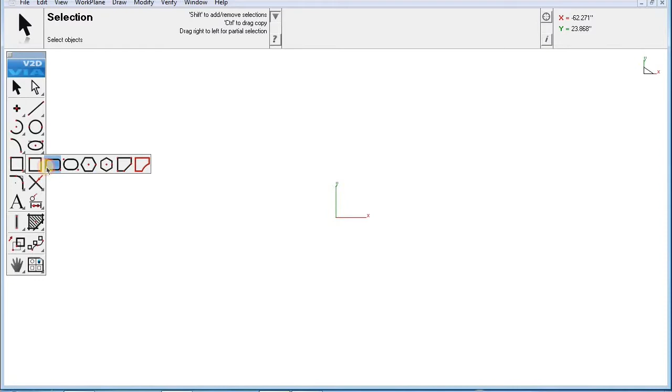First, we're going to want to select our square tool. You will see on the left hand side there's many different tools here, and if you click and hold down, all of the other types of tools and polygons will come up. We'll do this for every single tool. So first we're going to use our square tool. Let's do a 4 by 15 square.

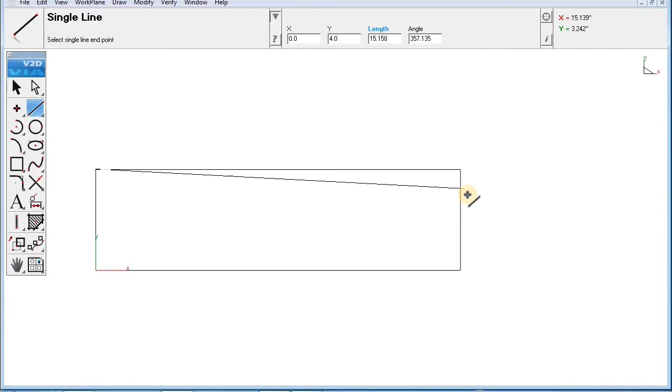Next, what we're going to want to do is draw our lines. These lines are going to make our shape. So we're going to basically take a line here, from here to here, to the midpoint, a line from here to here. Now, we could take and delete these two lines. Basically, you just click on the line, hit backspace to delete it.

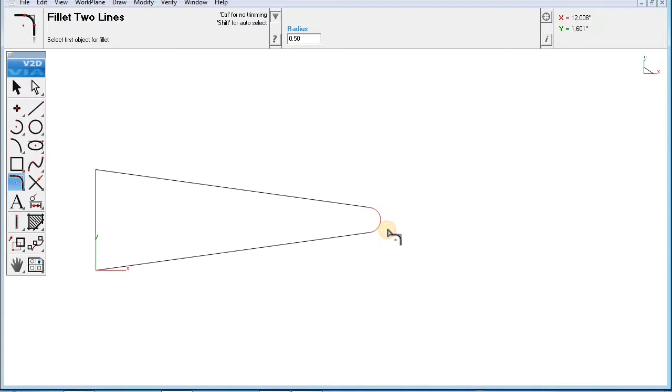And now we're going to take our radius tool. We'll try a radius of 1/2 inch. You're going to want to click on this line, and then click on this line. And then you're going to want to click this line to this line, this line to this line. Now we have our radiuses.

Now we're going to take and put a 1/2 inch hole on this end. So we're going to click, hold down, go to our single line, 1 point circle. We're going to type in 0.5. Now we're going to take and put our 1/2 inch circle in the center of this radius.

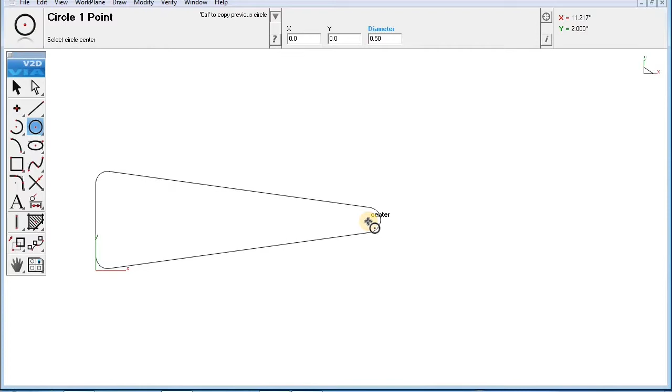Next, we're going to set this for a 2.5 inch pipe, as if you were to weld this onto an axle or whatever you would. So we're going to want to make a 2.5 inch circle, put it on our midpoint.

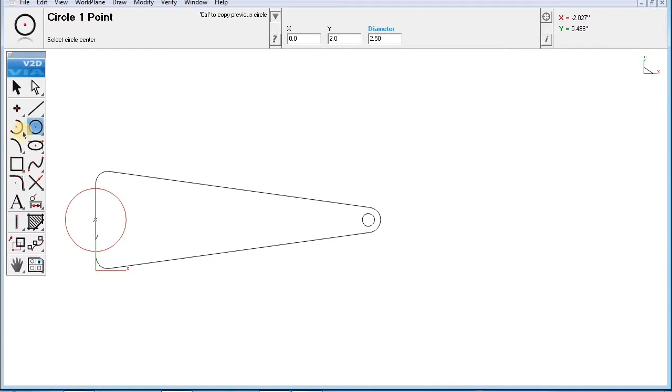Then what we could do is come over here to our center point arc. We're going to click once in the center, click on the 2.5 inch mark right here, swing it around up to here.

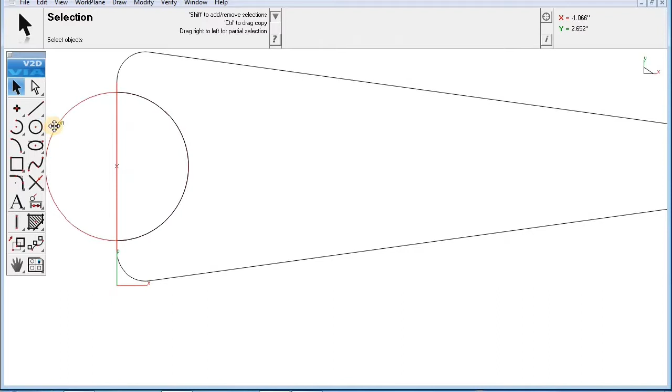And now we can take our selection tool and delete these two lines, and then we're going to take this line, connect it from here to here, connect it from here to here.

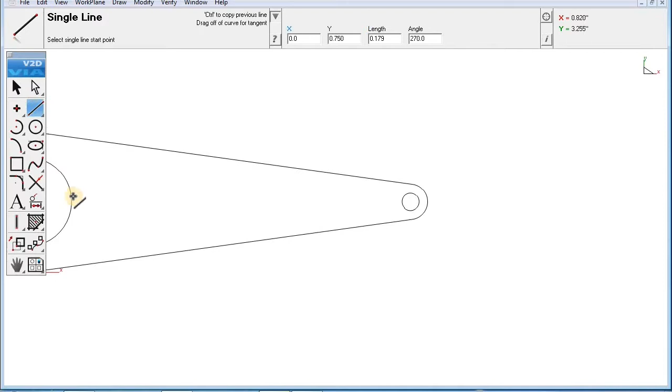Now to give it a bit of a better look, we could take it, put a couple circles down through here. The best way to do that is just to take and draw a center point line, and then we'll just do a 1.5 inch circle.

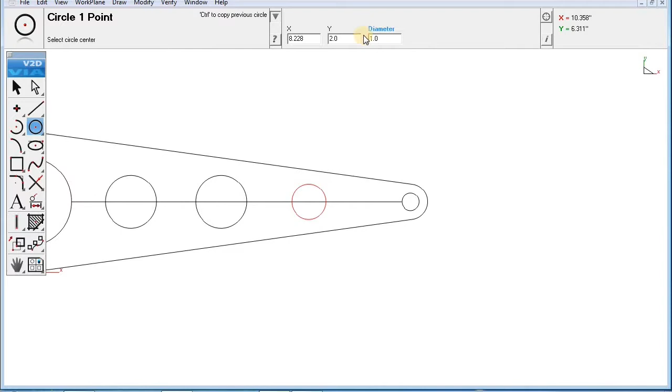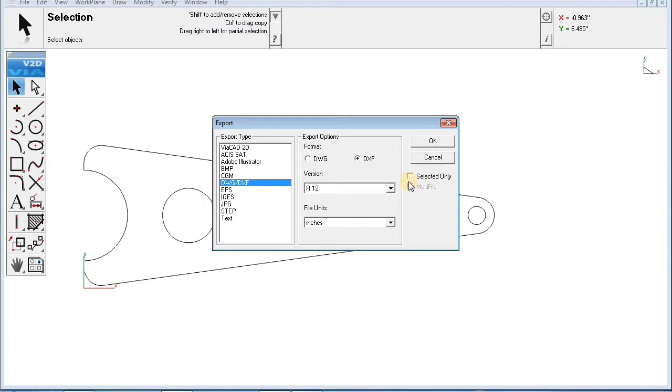Now if we want to send this out to be cut, we're going to go up to File, Export. We're going to export as a DXF, version R12, file units inches. We'll hit OK. We're going to save this to our desktop. Name it rear arm. I'm going to go ahead and save it.

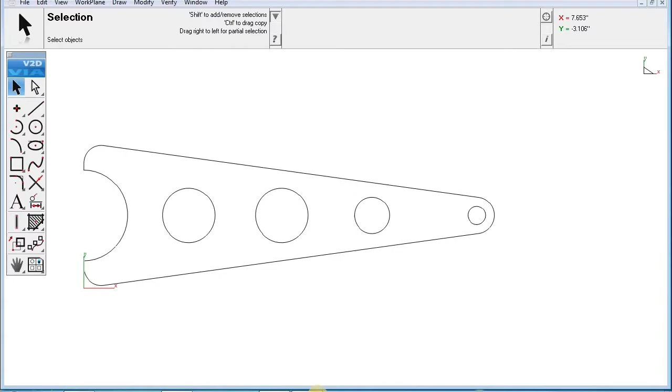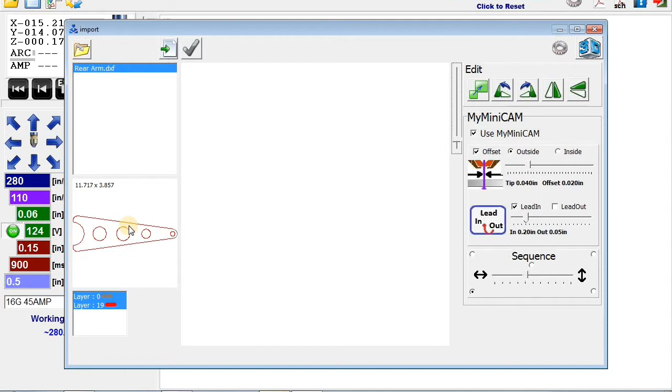Now this is when we're going to go to our Plasma CNC software. We're going to open that up. Come up here to Import. Click on that. We're going to click right here to bring in a file. Desktop. There's our rear arm right here. We're going to open that up. So there's our part right here. We're going to hit Import.

And now you can see we have MyMiniCAM on, so it's automatically seeing. This is going to be the first, second, third, fourth, and then the last cut.

Now for your lead in and lead out, we usually keep ours at 0.2. It's a pretty good lead in and lead out, which is right here. Your kerf width, which is going to be your tip offset, that's going to be the width that the plasma cutter cuts out. We usually leave that at right around 0.04 to 0.065.

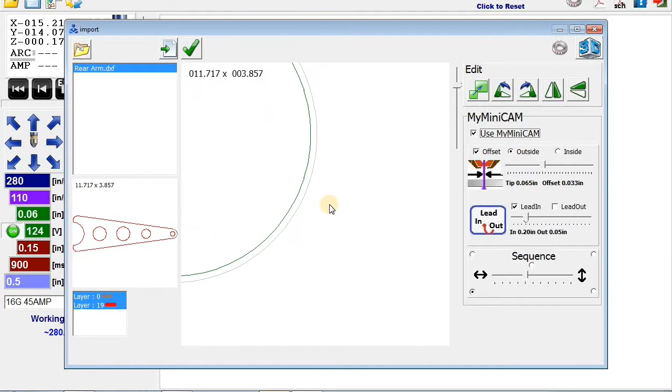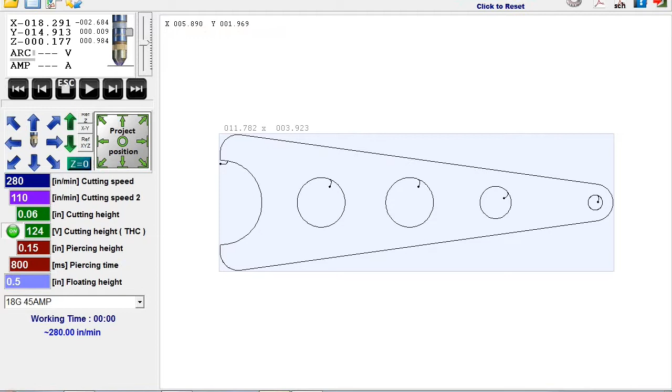After that, what we could do is hit OK. And now it's in the program. So now we're going to use the arrow keys on our keyboard to move our gantry where we're going to want to start, which is going to be the bottom left of your piece of material, or the bottom left of your free material that has not been cut. After you've moved it there, you're going to want to hit 0 the position. So now our position is zeroed. We're going to 0 our Z.

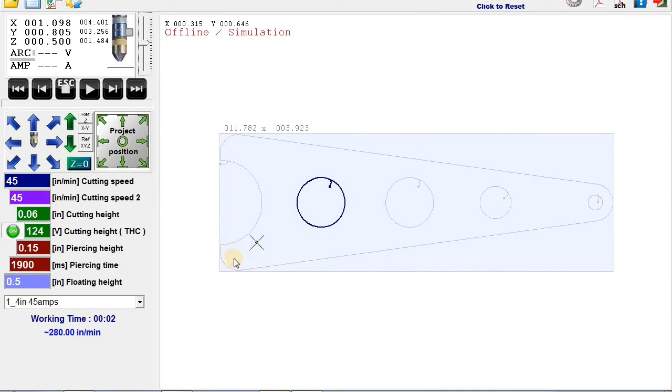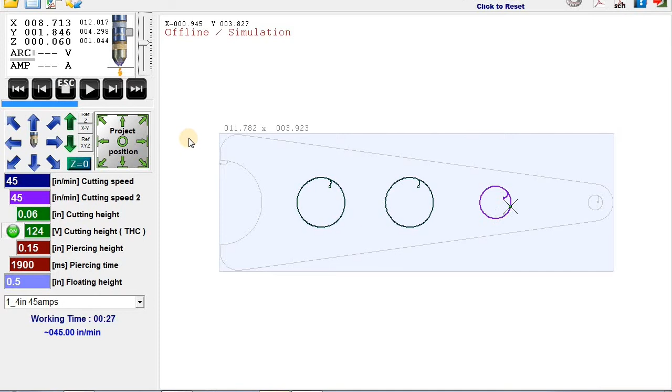For this, we're going to be using 1/4 inch. So we're going to come down here, select 1/4 inch. Now we can just hit start. You can see it's going to move to the first cut. Pierce, it's going to cut it out. Move to second cut. Third cut. And lastly, fourth cut. And we'll finish off with the radius on the outside.

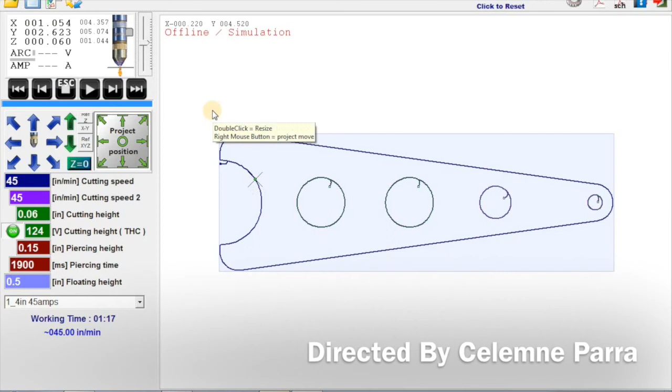And now it is finishing its cut. Now you should have a part cut out. Thank you for watching.